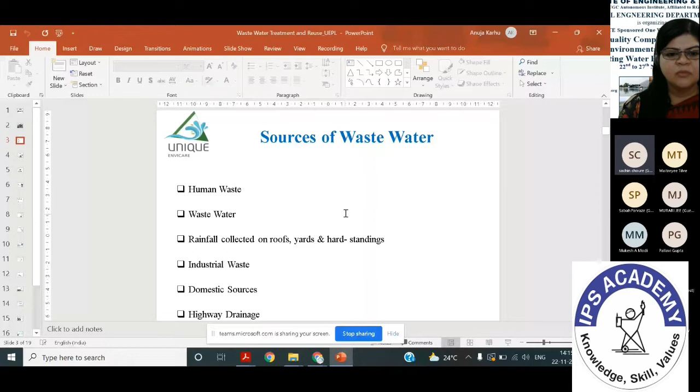Considering the environment, water and wastewater treatment and the reuse of treated wastewater is a major concern these days in construction areas. So first of all, we'll go with the source of water and wastewater treatment. So according to everyone, what are the sources of water? I have mentioned the source of water, what are the rest of the sources of water? You can find out.

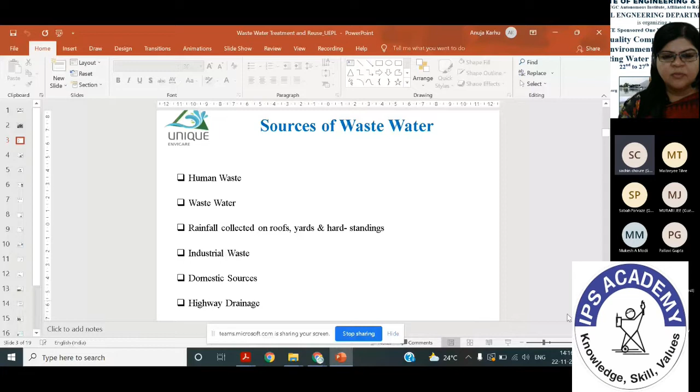First of all, we can see human waste, which is a major source of water for municipal areas. Whatever water we use on a daily basis, for cooking, washing, bathing, all that waste goes into the sewer lines only. So this is the major source of water these days we are facing.

Then wastewater from various sources - if water is coming from the road, rest of the impurities mix with the water and that water goes into the drain, that is also a major source. Then rainfall collected from the roof yard, if contaminated, that is also a source of wastewater majorly. Then industrial waste - industrial effluent generated is also a major part of wastewater. Then domestic waste, everybody knows that. Then highway drainage - if water is coming from the highway with oil spillage or leakage, the water becomes contaminated, which we again call wastewater.

Now I would like to ask, can any of you tell me what is sewage according to you? Can somebody answer that? Any of the participants? As I mentioned, it should be an interactive session. Anybody? A participant replied: ma'am, whatever water we use and then discard, that is called sewage.

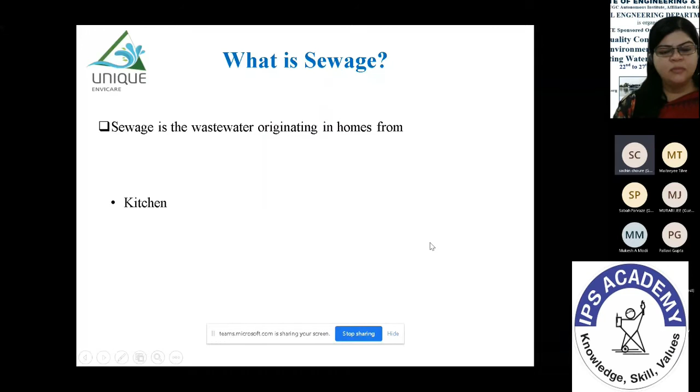So as I said, what is sewage? The sewage is majorly the wastewater originating from the home. So it is kitchen waste, as mentioned in the picture, it is laundry waste, waste from the wash basin. See if you can see this. Then bathroom waste, toilet waste. In one word, it is human waste.

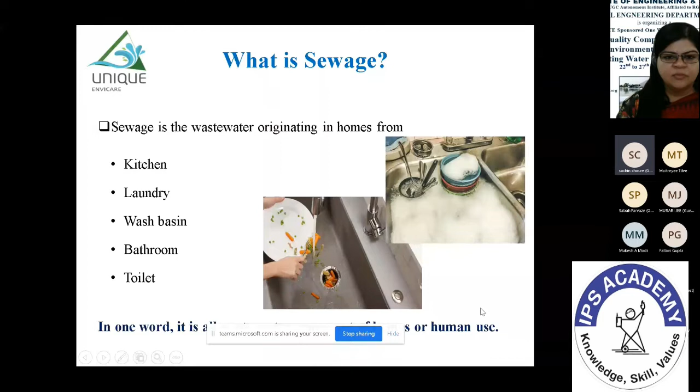So where does it all go? If anyone can answer me, whatever water we are using on a day to day basis, 90% of that water is going into the sewage. So what we are consuming is only a small part, and the rest 90% of the water we use daily is going into the drain.

So whenever you flush the toilet, the water content goes into the sewer line. As you can see in the picture, your washing areas, bathroom waste, basin waste, all go into the sewer line. So showing all these things, I just wanted to mention this.

We need to understand the treatment need of wastewater, mainly because of the amount we are using. For example, if we use 100 liters of water in a day, 90 liters of that water is sent into the wastewater stream, into the drains.

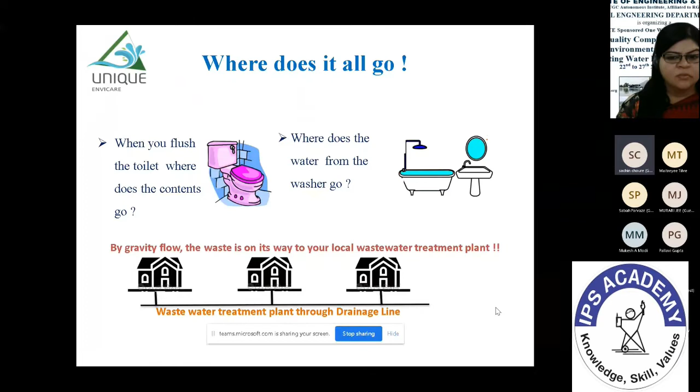So what is the effect of wastewater pollutants? Can someone answer this? Any students? I would expect a reply from some student. Right, participants, please, if you can answer the question.

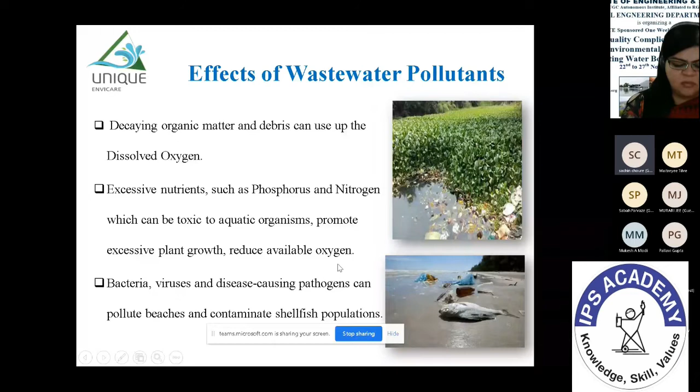So what is wastewater treatment? We need to understand that first. Sewage treatment addresses the contamination due to municipal waste. With treatment, we are reducing that contamination and making the water suitable for further utilization, such as for flushing or gardening purposes.

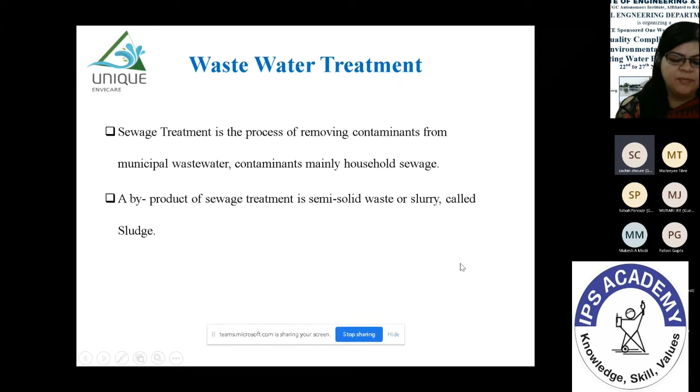Now what are the levels of sewage treatment? First of all we will understand the sewage treatment levels. First we do the natural treatment, called primary treatment, for the sewage which is coming into the stream.

What happens in that? In the primary treatment we remove the floating matter. As you can see, we are removing the floating water and floating matter. There is a grit chamber given there, and the floating matter is pushed further.

In the secondary treatment, called biological treatment, degradation of organic matter by aeration takes place in the wastewater treatment plants. You can see the image of that - aeration happens, and it is a biological treatment process.

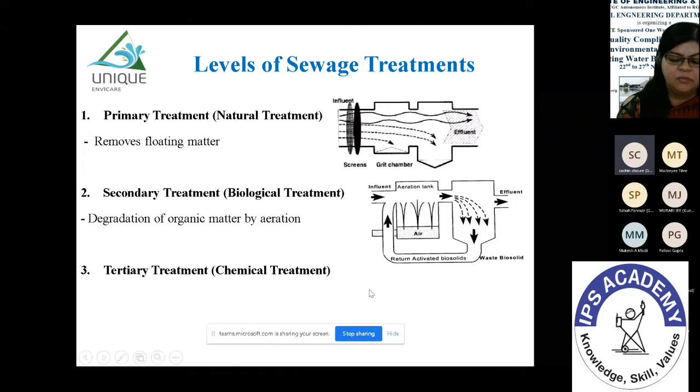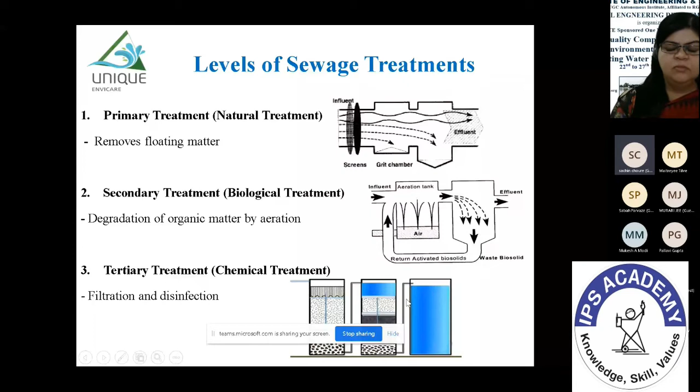Then tertiary treatment, which means chemical treatment, where filtration and disinfection take place. These are the chambers where filtration of the treated water from the primary and secondary stages happens. Tertiary comes with chemical treatment, where filtration and disinfection occur, and we get this treated water from the plant.

So what are the technologies of STPs these days that are majorly available in the market and popular, according to the requirement of the plant and the requirement of area spaces? Preparation of any plant requires spaces, areas, and a number of things that impact the design of the STP.

Considering being an engineer, you need to understand that if you want to install an STP there, you need to understand the area requirement of that particular STP. You need to understand the levels at which inlet is coming, the levels at which outlet is coming, how the water is coming to the plant, and how that entire plant is going to be constructed.

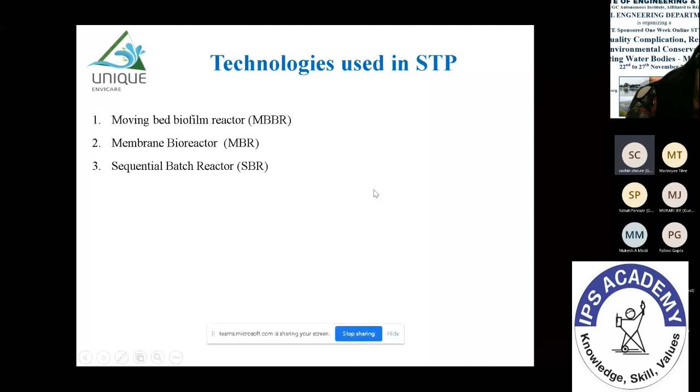Again, there is the constructed wetland system, also called a phytorid system. We can say this is a natural system for primary and secondary treatment, and for tertiary treatment we have to use filtration and disinfection as mentioned.

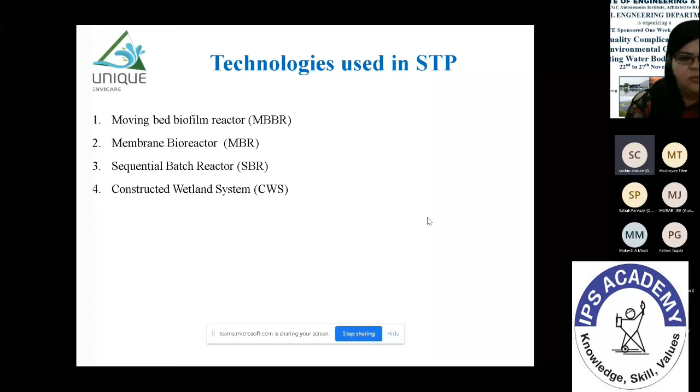So again, regarding the MBBR technology detailing, I would hand over to my technical engineer. She will explain what happens in MBBR technology. I would introduce Miss Sankita, she is our design engineer, and she will explain what MBBR in short is. Hello ma'am, welcome. Yes hello ma'am, thank you.

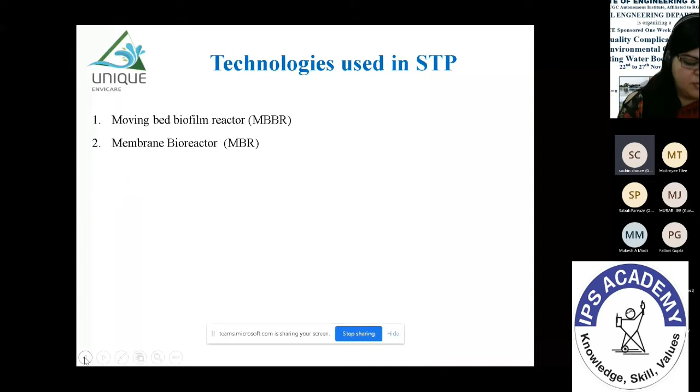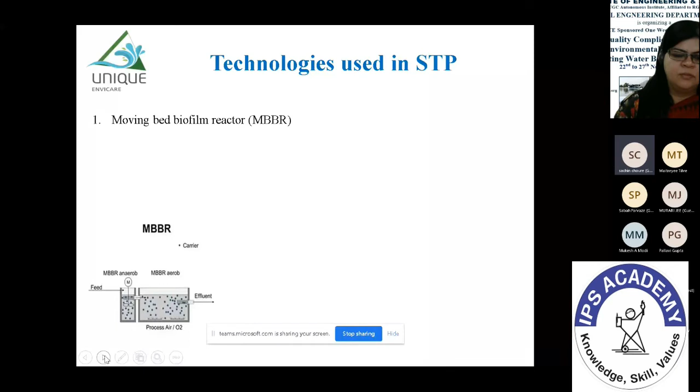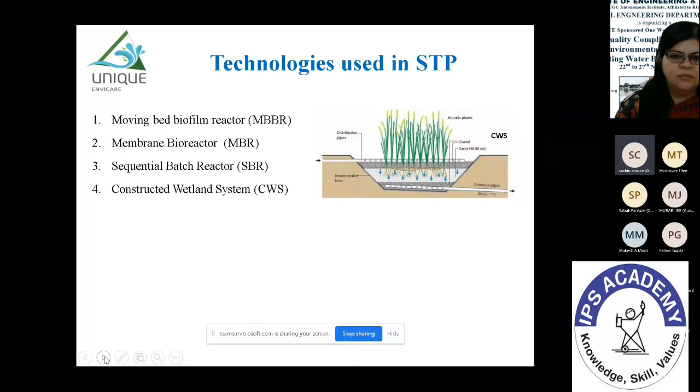जो आपको स्लाइड दिख रही है, यहाँ पे एमबीबीआर लिखा हुआ है, वहाँ छोटे ब्लैक कलर्स के मीडिया दिखे, उसमें एक टैंक एमबीबीआर में आता है, उसमें एरेशन देके ये मीडिया डाले होते हैं। इसलिए इस मीडिया की वजह से उस टेक्नोलॉजी को नाम दिया गया है एमबीबीआर टेक्नोलॉजी। इसमें होता क्या है कि जब कंटिन्यूस एरेशन देते हो तो बैक्टीरिया उसमें बैठ जाते हैं, जो भी ऑर्गेनिक मैटर सीवेज में चला आता है वो डाइजेस्ट करने के लिए ये मीडिया का बैक्टीरिया एज अ होम इस्तेमाल करते हैं।

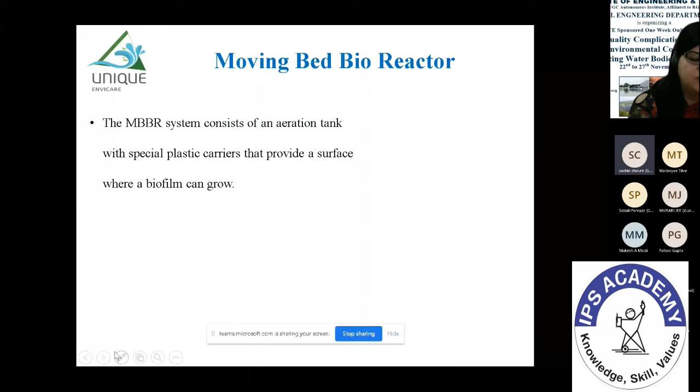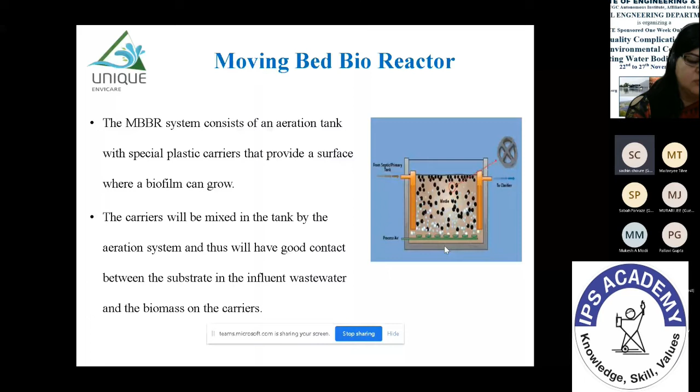जो मीडिया है उसके ऊपर बैक्टीरिया बैठ के पूरा डाइजेशन करते हैं, और उसके बाद में स्लज, जिसको डाइजेस्टेड ऑर्गेनिक मैटर कहते हैं, वो प्रोड्यूस हो जाता है। उसको निकालने के लिए आगे सेकेंडरी ट्रीटमेंट देते हैं, उसमें क्लेरिफायर दिया होता है।

मैं अभी प्रोसेस फ्लो डायग्राम जो है एमबीबीआर की, मतलब जैसे सीवेज इन होता है तो आउट होने तक जो भी ट्रीटमेंट होती है, वो थोड़ा सा एक्सप्लेन करना चाहूंगी। If anyone wants to ask any question, please ask me. You can text also.

Is it visible to all, this diagram? It's visible to me, ma'am. Participants, is it visible to you? Yeah, it might be noise for me. It might be, if you are okay with it, then also.

रॉ सीवेज, जैसा मैम ने बताया, उसमें अपना बाथरूम वेस्ट है, टॉयलेट वेस्ट है और किचन वेस्ट जो भी है, मतलब आप होम हाउस में बैठ के जो भी वर्कआउट करते हो, जो भी काम करते हो, उसमें जो भी वेस्ट वाटर आता है उसको एक चैनल बना के, जिसे ड्रेनेज लाइन सिस्टम कहते हैं, उसके थ्रू वो एसटीपी प्लांट में, मतलब सीवेज ट्रीटमेंट प्लांट में इंट्रोड्यूस किया जाता है।

उसे रॉ सीवेज बोलते हैं, जो फर्स्ट स्क्रीन चेम्बर में आता है। वहां होता क्या है कि जो फ्लोटिंग मैटर है, मतलब कोई भी क्लॉथ्स हो, कोई कपड़ा हो, या किचन से कोई निकला वेस्ट हो, जो ड्रेनेज लाइन के थ्रू एसटीपी में गया हो, तो वो वहां निकल जाता है। इसके थ्रू जो स्क्रीनिंग हो जाती है, बाद में अपना सीवेज वाटर फ्लो करके इक्विलाइजेशन टैंक में जाता है।

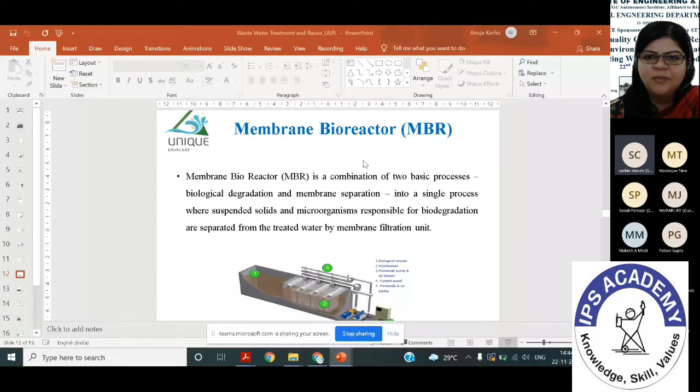जैसे कि मैंने पहले बोला कि जो टेक्नोलॉजी है वो सेकेंडरी ट्रीटमेंट पे डिपेंड करती है। अभी जो मैं आपको 4 ट्रीटमेंट बताने वाली हूँ वो पूरा सेकेंडरी ट्रीटमेंट ही है, सिर्फ होल प्रोसेस फ्लो चार्ट में चेंज होते रहते हैं। तो मेम्ब्रेन बायो रिएक्टर में क्या होता है कि जैसे हमने अभी जो ब्लैक कलर का मीडिया दिखाया वो इस्तेमाल किया, उसकी जगह पे मेम्ब्रेन लगाए होते हैं। जैसे आपको रिवर्स ऑस्मोसिस सिस्टम मालूम होगी, उसमें जैसे मेम्ब्रेन होते हैं उसी टाइप के, सिर्फ उनके कैरेक्टरिस्टिक्स अलग रहते हैं, वैसे मेम्ब्रेन लगाए हुए रहते हैं और इसलिए इसको मेम्ब्रेन बायोरिएक्टर बोलते हैं।

और द थर्ड वन इज कंस्ट्रक्टेड वेटलैंड सिस्टम्स। यहाँ पे क्या होता है कि कंस्ट्रक्टेड वेटलैंड मींस नेचुरल सीवेज ट्रीटमेंट। यहाँ पे हम जो प्लांट्स हैं उनका इस्तेमाल करके ट्रीटमेंट करते हैं।

जैसे हमने घर के पीछे वगैरह देखा होगा। जब एकदम पुराना जमाना था, वहाँ पे कुछ पर्टिकुलर प्लांट लगे होते थे, जो नेचुरली अपने वेस्ट वाटर को क्लीन करते थे। So this is the technology which is majorly developed by the NEERI, and further it changes into the constructed wetland thing.

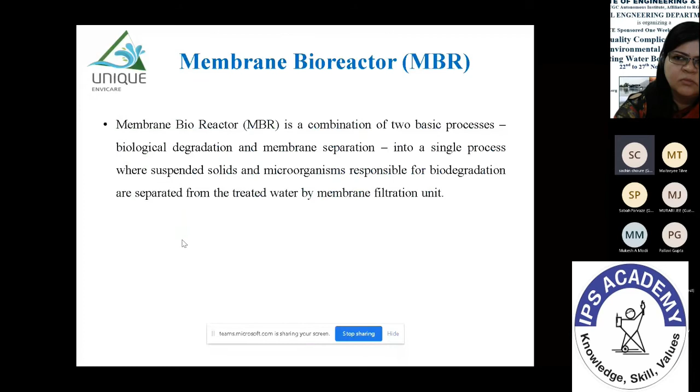So these days, this technology is quite popular in our area, where the people want to use the area. But the only problem with this technology is that we need a larger space, little bit larger than the regular MBBR technologies.

Using this technology, we are reducing the electricity requirement of a particular area, society or residential area. So these days we are introducing and promoting this technology majorly to utilize and treat the wastewater, and minimizing the electric requirement of that particular project.

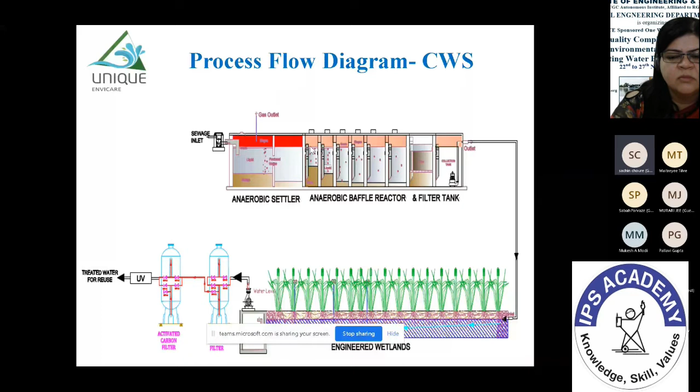So she will explain. I have a question, ma'am. How is this related to the electric requirement? So if you can see in the MBBR technology, let's go to the MBBR technology first of all.

So electricity charges for this treatment are higher than CWS. In the CWS plant, we need not this secondary treatment, which I am ruling out - we need not mention it over there. So the electricity requirement for the air blower is reducing. Majorly due to the CWS, our electricity requirement comes to just 10%.

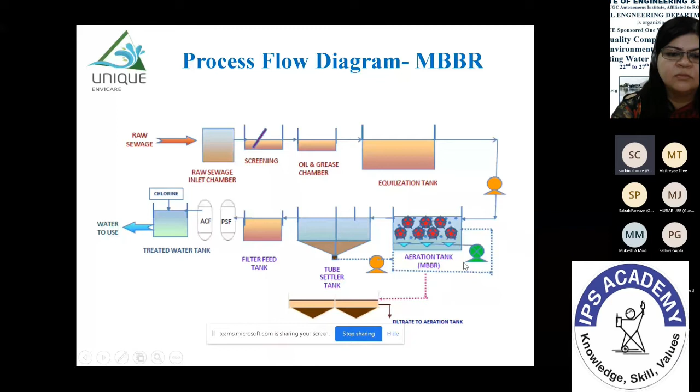बस यहाँ पे अपने को 24 आवर्स वो एयर ब्लोअर चलाना पड़ता है, उसका जो इलेक्ट्रिकल रिक्वायरमेंट होता है वो इतना कम हो जाता है कि सीडब्ल्यूएस प्लांट चलाने के लिए हमको 10% ऑफ इलेक्ट्रिसिटी लगता है इंस्टेड ऑफ एमबीबीआर। Okay, ma'am, got that.

So this is just SBR technology - जैसे कि मैंने नाम यहाँ पे लिखा हुआ है कि सिक्वेंशियल बैच रिएक्टर, जो भी बाकी 3 ट्रीटमेंट हैं ये कॉन्टिन्यूस प्रोसेस करते हैं, पर जो ये सिक्वेंशियल बैच रिएक्टर है वो बैच बैच चलती है। इस एसबीआर का एक-एक बैच 6 से 10 आवर्स का रहता है।

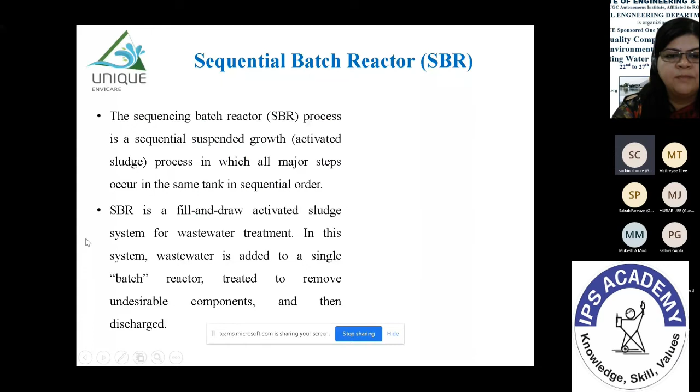यहाँ पे होता क्या है, मैं कुछ स्कीमेटिकली दिखाती हूँ कि जो मैंने पहले एमबीबीआर के प्रोसेस फ्लो में एक्सप्लेन किया कि नेचुरल ट्रीटमेंट, प्राइमरी ट्रीटमेंट में फ्लोटिंग मैटर्स वगैरह निकाले जाते हैं, और फिर बाद में इक्विलाइज सिस्टम में आकर सेकेंडरी ट्रीटमेंट में पास आउट होता है।

तो सेकेंडरी ट्रीटमेंट यहाँ पे है जो बैच में है, और यहाँ पे फिल एंड ड्रॉ जैसे सिस्टम है. फॉर एग्जांपल अगर 8 घंटे का बैच ट्रीटमेंट लिया, तो पहले 2 घंटा फिलिंग होगा, बाद में 4 घंटे उसी टैंक को एरेशन देके रिएक्ट करने के लिए रखना पड़ेगा. फिर बाद के 1 घंटे में वो सेटल डाउन करना है, मतलब जो भी स्लज जनरेटेड हुआ है उसमें पार्टिकल्स सेटल हो जाएंगे, और फोर्थ स्टेप में ड्रॉ होगा, फिर फिफ्थ स्टेप में फिर से प्रोसेस में लेने के लिए सिस्टम को तैयार करना है.

तो ये जो सिक्वेंशियल बैच रिएक्टर प्लांट की सिस्टम रहती है वो बैच बैच रहती है, जैसे कि बाकी जो 3 सिस्टम बताए वो कंटिन्यूअस फ्लो में रहते हैं. और अभी जो म्युनिसिपल या गवर्नमेंट के ज्यादातर प्लांट हैं जो एमएलडीज में होते हैं, 5 एमएलडी, 10 एमएलडी, अराउंड 20 एमएलडी, वो सब अभी एसबीआर प्रेफर कर रहे हैं.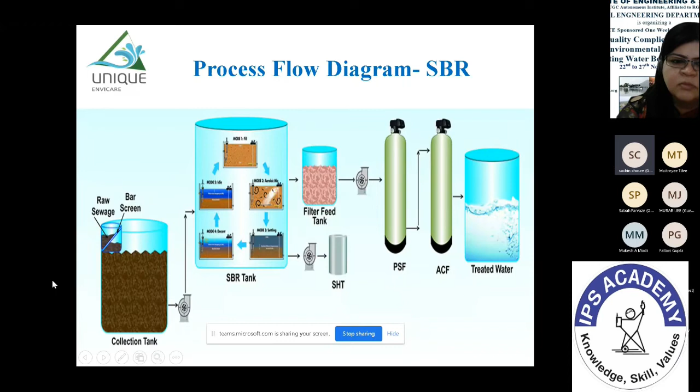तो अभी क्या होता है कि एमबीबीआर में हर एक प्रोसेस के लिए अलग अलग टैंक देना पड़ता है, पर यहाँ पे एक ही टैंक में ये 5 प्रोसेस हो जाते हैं. इसलिए यहाँ पे एसबीआर को जो स्पेस रिक्वायरमेंट है वो कम है कंपेयर टू एमबीबीआर. That is why it is more popular into the MLD areas, and the result is also good in the SBR system.

यस, और नेक्स्ट स्लाइड पे मैं आपको एक कंपैरिजन दिखाना चाहती हूँ कि जो मेन एरियाज हैं कि किस बेस पे हम टेक्नोलॉजी डिसाइड कर सकते हैं. तो ये जो पॉइंट्स हैं, यहाँ पे जो मेजर पॉइंट होते हैं कि जब टेक्नोलॉजी लेनी है तब डिस्कस किए जाते हैं कि एरिया रिक्वायरमेंट कितना है.

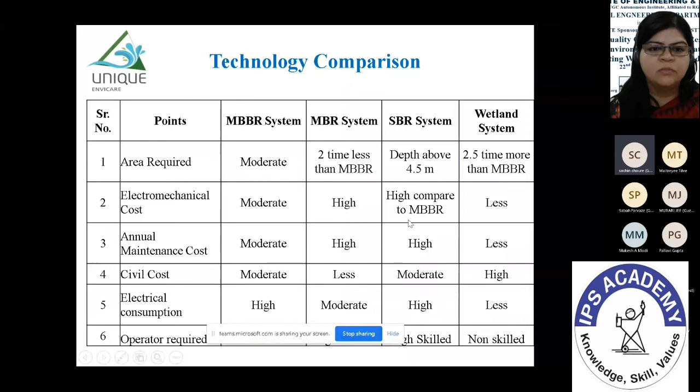So this is the overview I could mention in this presentation. Now I expect a few answers, as students are not responding, but I would still expect some answers. Does anybody have any idea how much water one person uses in one day? Does anyone have an idea? Can someone answer how much water one person needs in a day?

Please participants, what is the water requirement for one person? Please respond, or you can type in the chat box. People are not answering.

So I would like to mention this. According to the NBC, which is the National Building Code, we need 135 liters per person per capita in a day. If we have 5 people at our place.

There is a response by Venkat Raman sir, who has responded 135 liters. I could not see the response. Should I share my screen? Yes please, if someone wants to talk that is more appreciated still. Yes ma'am, Venkatraman sir has responded that 135 liters are required.